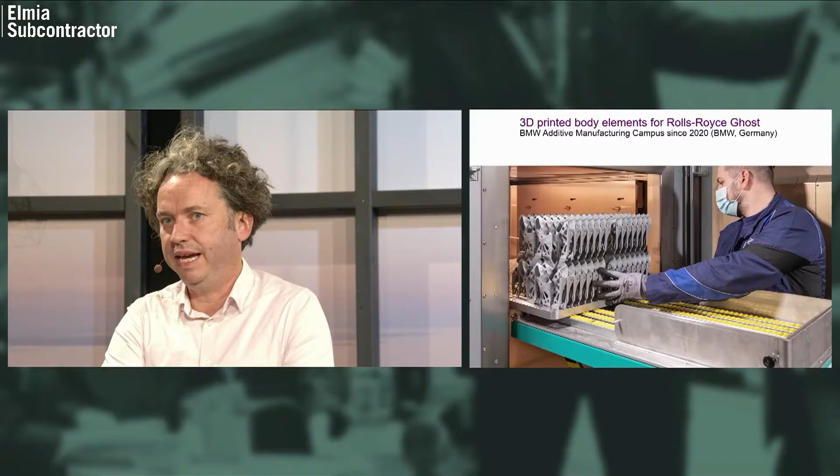So relevant that Volkswagen and others plan to use 3D printing in their plants to directly produce parts, like BMW, which opened an additive manufacturing campus last year.

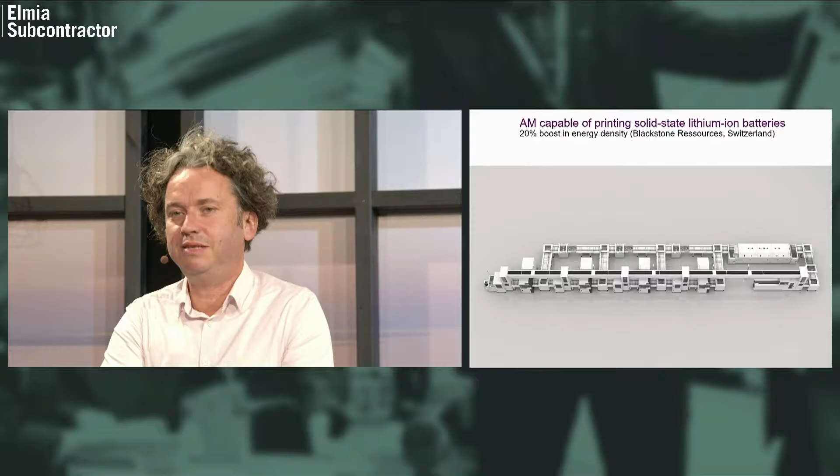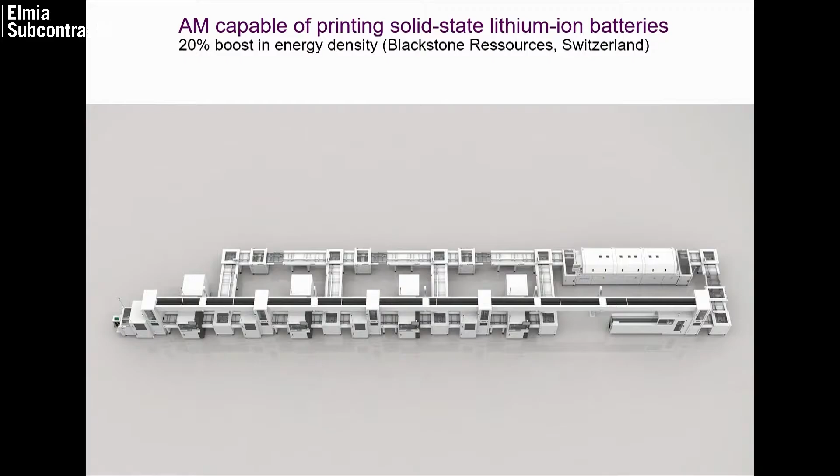When it comes to battery technology, 3D printing could support the whole development. For example, Swiss company Blackstone Resources successfully printed solid-state lithium ion batteries with a 20% boost in energy density this year, and they were successfully producing this battery at their manufacturing site. They set up Europe's first manufacturing site for 3D printed batteries in Saxony right now.

So we see that 3D printing is coming closer to the consumer goods industry. For example, Miele offers templates to their clients to print accessories for home appliances, and they offer this to their clients on a platform called 3D4U. In other areas like the sports shoe industry, we see the first real products that are 3D printed

coming on the market right now. Maybe you remember the Adidas project Futurecraft, which they presented some years ago to print individual shoe soles, and you can buy them now. They are on the market. It's not future anymore. Next step is the integration of 3D printing and robot technologies in a project called Futurecraft Strung.

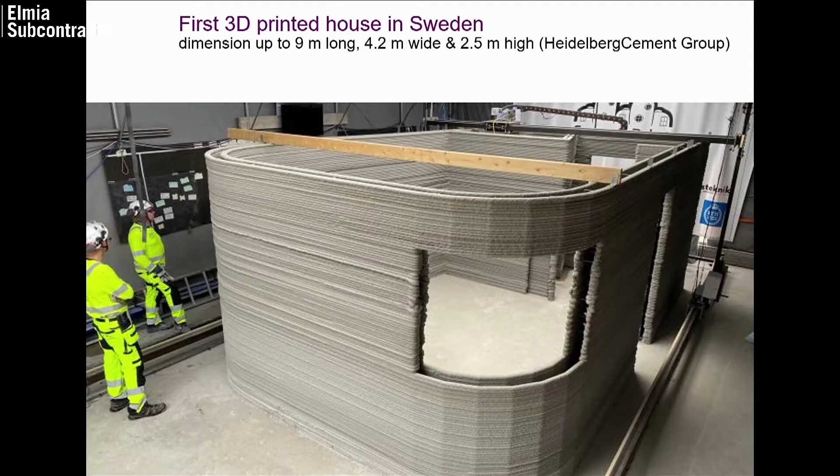And then it's about housing. In the building sector, 3D printing will change the way we are going to build in the future. You have probably heard about printed buildings in the Netherlands, in Germany, in Dubai, and in Austria. This is Sweden's first 3D printed house,

recently published very interesting images. They use concrete from Heidelberg Cement, which developed also the material for other buildings which are produced with 3D printing right now in Germany and other countries.

But this is not industrial, so let's come to industrial applications of AM. Maybe you have heard about the 3D printed bridge from Amsterdam, which was installed this summer. This is made from metal welding using a robot arm to produce that metal bridge, which can also have an interesting impact on industrial areas.

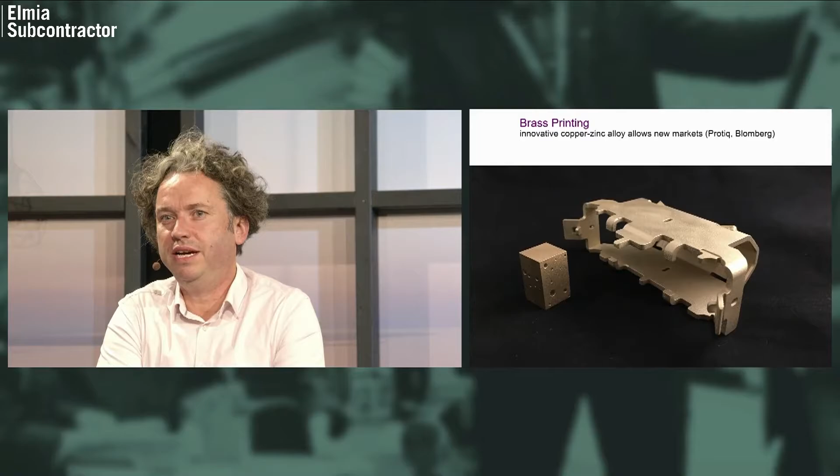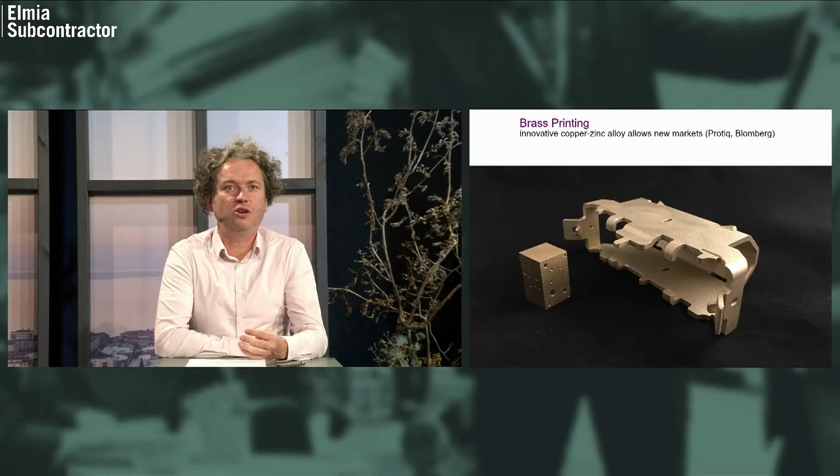A company called Protiq sent us some demonstrators. In that case it's brass printing, a copper-zinc alloy. We have copper printing in our exhibition for inductors. You can also imagine using copper printing for producing electric motors in the future. That's an example of additive drives from Dresden. We try to get this piece maybe next year. We have it in our exhibition, and we have that one from Incus 3D.

It's a lithography-based metal process for very small, tiny and precise parts. We have a couple of these in our exhibition, and then getting smaller, Fraunhofer invented a new technology using screen printing to produce three-dimensional parts in an additive way. That's very tiny parts in our exhibition, and we have that on display.

And of course other materials, like glass, are possible to print right now. That's in research—some at ETH Zurich, by the way—and some startup companies just started their business using glass for 3D printing possibilities.

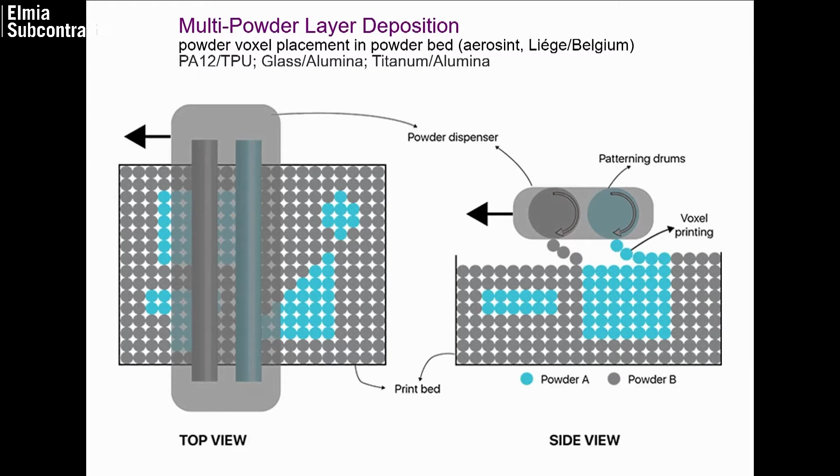In that case they are able to print two different materials. It's not possible to mix any material, so you see the combinations they're able to achieve: PA and TPU for example, glass and alumina, titanium and alumina. That's possible right now, and they are working on more combinations. That's a demo project they published last year.

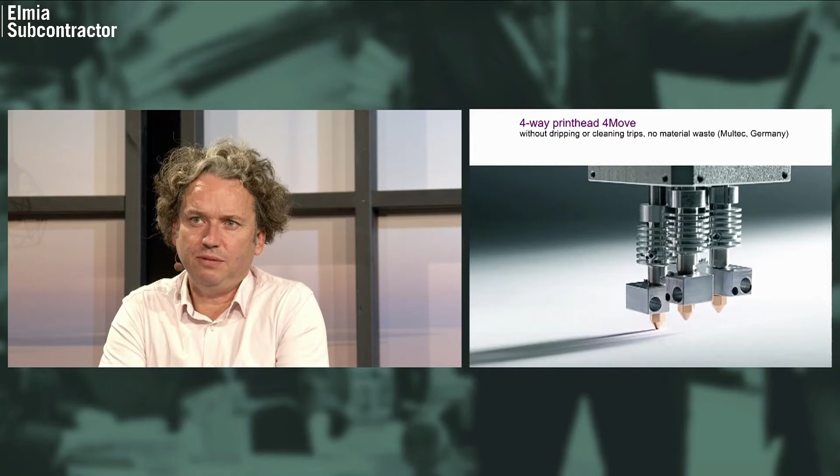And then it's about a combination of different plastics. For that, Multec from Germany developed a certain print head with the possibility to have four different filaments in the print. That's on the market, and we have it in the exhibition. Of course you can combine different colors in 3D printing, but maybe you can also imagine different qualities of plastics—some stronger than others, flexible, or whatever you can imagine.

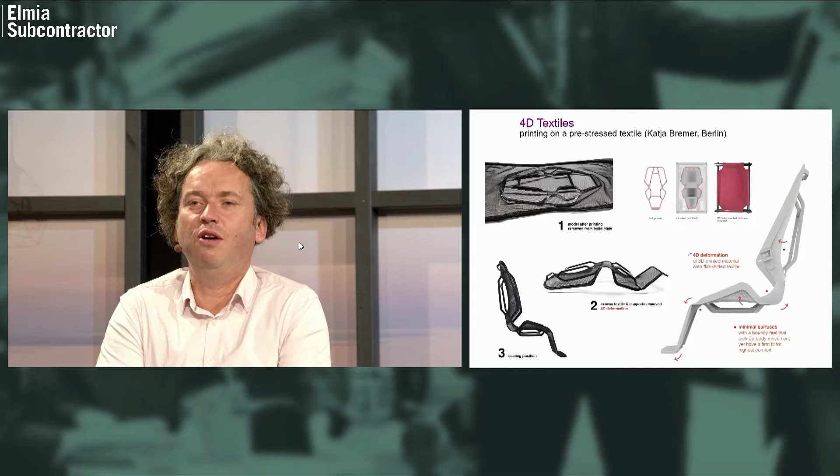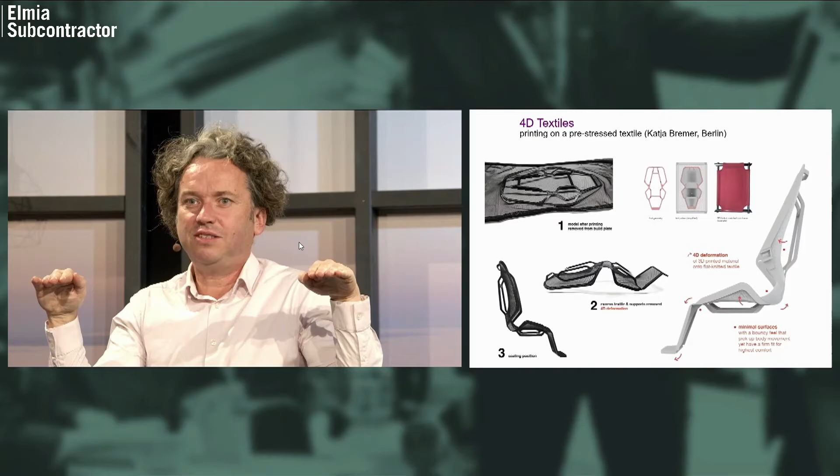This is the last example: maybe you've heard about 4D printing. 4D textiles are textiles that are printed on a pre-stressed textile, and when you release the stress, the stretch, then you see that the textile moves from a flat surface into a third dimension—and the time is the fourth dimension.

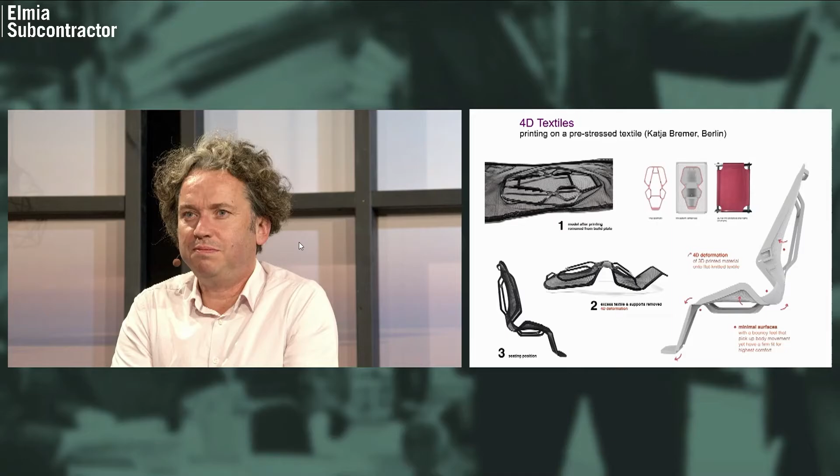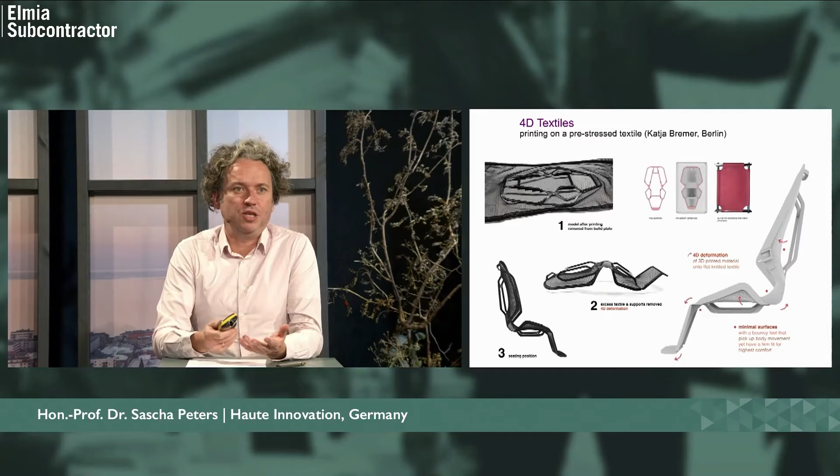In that case we have a development on display from Katja Bremer, a designer from Berlin. She had the idea of printing a seat in two dimensions, and then when you release it, you get the energy back, and it transforms into the third dimension. Very, very interesting technology to efficiently produce products in the future.

We have a lot of these examples in our exhibition, and you are welcome to come and see all the things. Thanks a lot for listening to me.